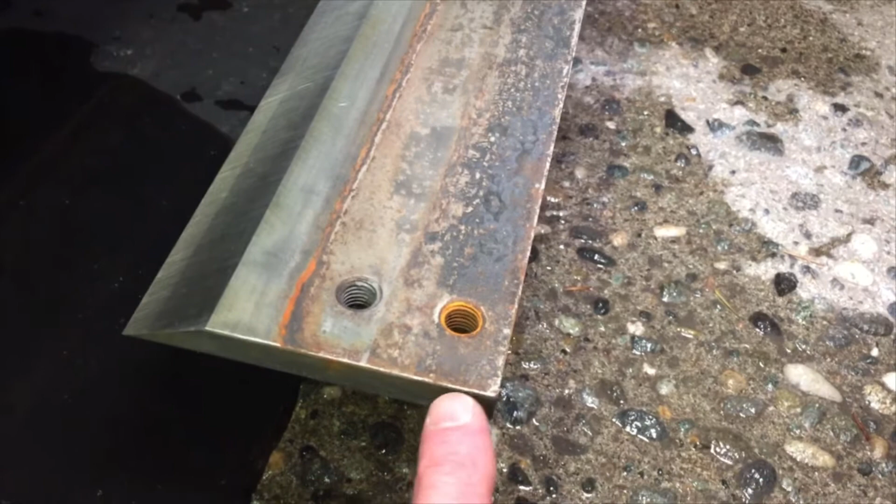One thing I want to address real quickly is the difference between the front bolts and the rear bolts. The front bolts here are used when the blade is super long, pretty new. As the blade gets sharpened and gets shorter and shorter, you use the rear bolts because it sticks the blade out a little bit.

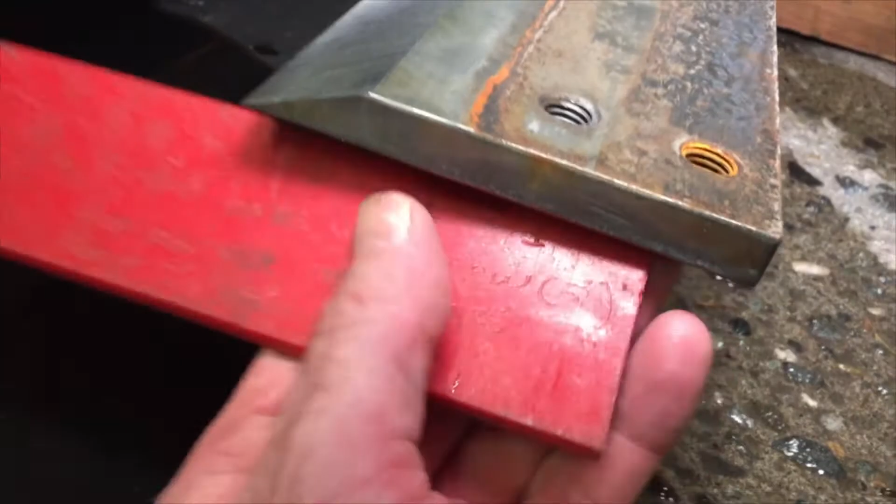So what you're shooting for here basically is anything underneath 4 inches, you're going to start using the rear bolts. You can see with this little measuring thing I made, right now I'm about 4.5 inches, so I've still got quite a bit of time before I have to use the rear bolts.

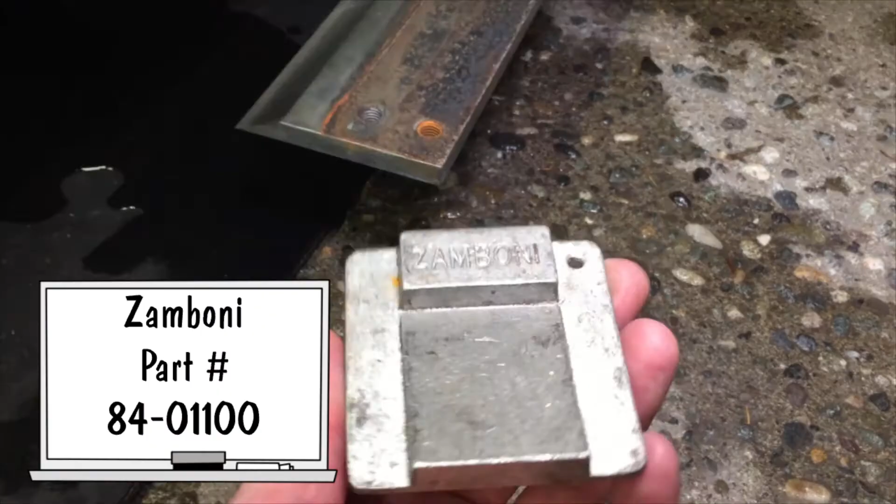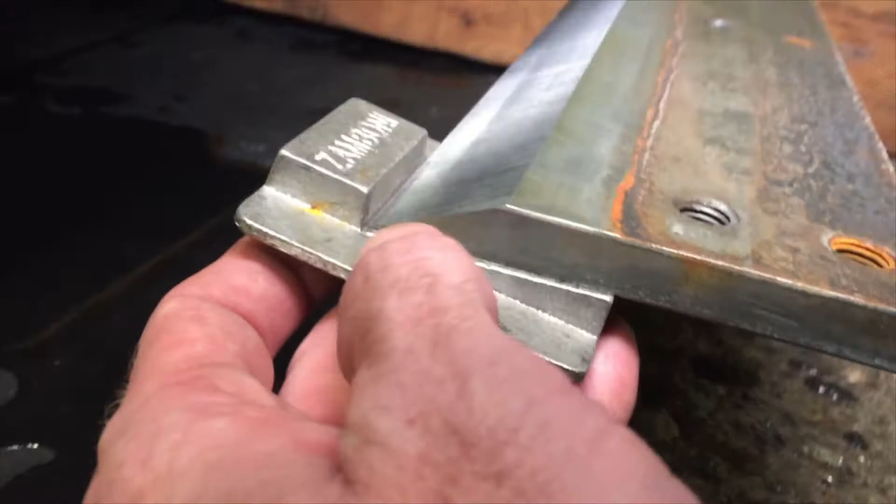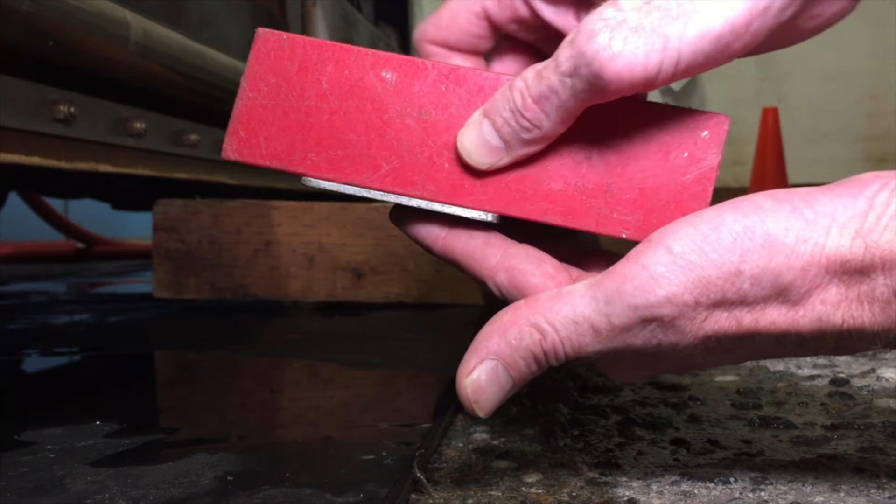While the blade's off the machine, I'm going to show you this blade adjustment tool that you could use. How this works basically is when the blade's on the machine, you stick this part on the blade, and this flat part you see is where the conditioner runner is. So this is on the blade, and let's say this red thing here is the conditioner, and if it's not lining up flat with the flat part on this blade angle tool, you want to adjust your blade so it does line up with the runner.

Let's say this thing right here is the runner and it's sitting like this, so you'd have to lower the blade down to get it level with your conditioner runner. And conversely, if it's too high, then you have to raise it up. So when I get this thing on the machine, I'll show you. I just want to show you here off the machine first. I'm going to place it on the blade and check how the conditioner matches up to this little flat part on this blade adjusting tool.

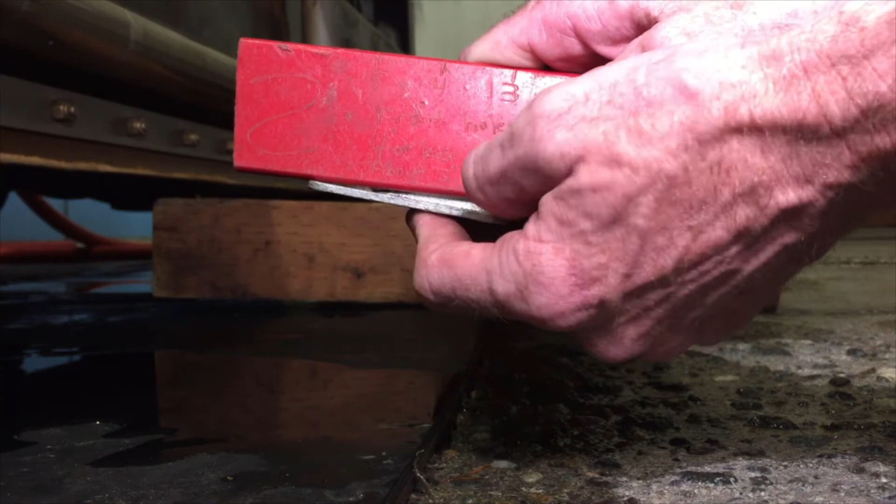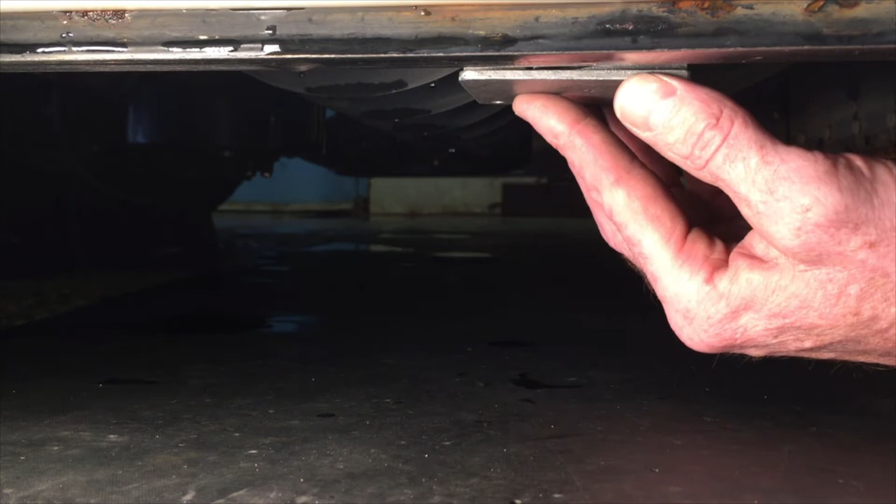I think I got a good view for you guys here. Again, with this blade adjustment tool, you want the blade to sit in this angled part right here, and you want the conditioner's runner to lay flat or flush with this part. So once you set it in there, I slide it towards the runner a little bit to see if it sits on the runner or hits against it. As you can see, it's bumping against the runner on this part right here.

So I want to lower the blade down so this flat part sits flush with the runner. Let me go ahead and give a few turns on the blade. All right, let's go ahead and recheck it here - stick it on the blade and slide it towards the runner.

Ooh, a little close. It seems like it's hitting on this backside just a little bit. But it's hard for me to see around the camera, so hold on here.

Kind of rocking a little bit in there. So I'm gonna call it, I need to go up a little bit because now it's hitting right here. All right, let's go ahead and check it again.

Stick it on the blade so it's flush with the blade and slide it over the conditioner runner. As you can see, it's sitting flush with the runner while it's on the blade, so it's set to the 10 degrees that Zamboni recommends. Nothing much to it, you just want to make sure this thing is sitting on the blade itself, and you slide it over to the runner, and if it's flush with the runner, you're good to go.

Let's go ahead and switch views here, and I'll show you how to do it with the washer, the sticker, and the blade bracket. After using the blade adjustment tool to set the angle of the blade, you slide the washer and the blade bracket right here, and you can tell it's lined up with the line there. As well as I could use this blade adjustment tool to do the same thing.

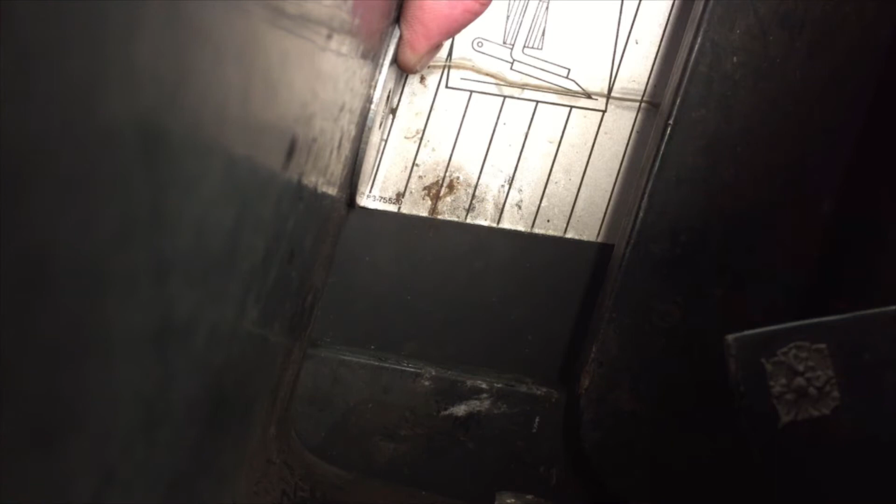Now you can tell right here that the washer is not parallel to the line right there. So what you want to do is turn the blade up or down based on where you are, so it matches these lines right here.

In my case, I know I have to move the blade forward to get the washer. Now I'm really looking at the back of the washer, and this plate right here needs to be parallel with the line. Well, I guess front of the washer, back of the washer, it doesn't really matter. Just make sure that they're parallel with the lines.

I got it back in position where it's at the 10-degree mark, where Zamboni recommends you have it set. Again, you can use this blade adjustment tool to do the same thing. Let me go ahead and switch views right here to give you a better look at this blade bracket with these lines right here.

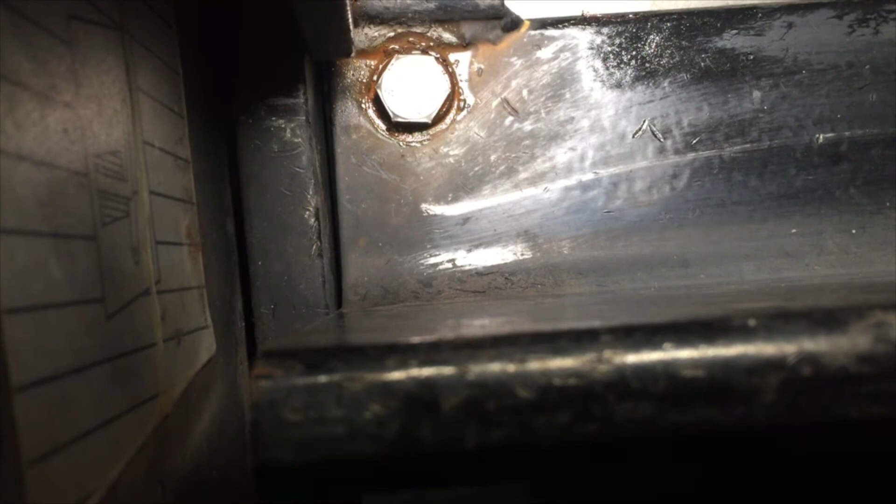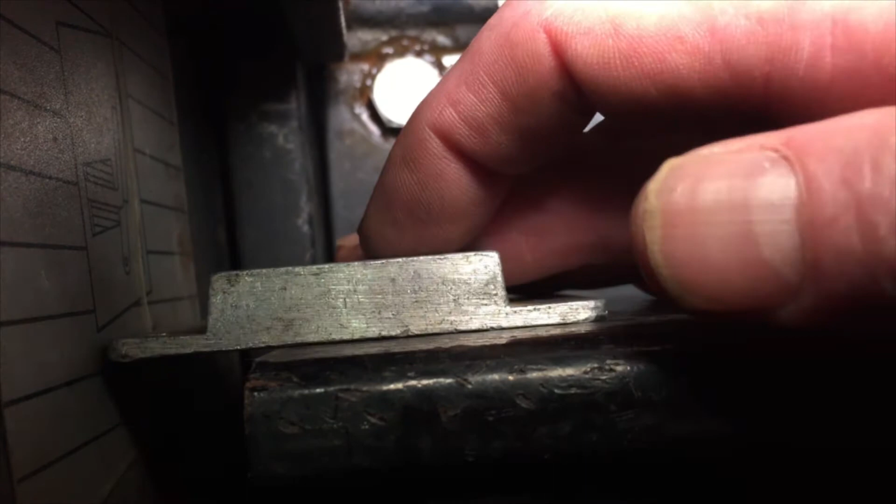All right, here's a top-down view of the blade bracket. I'll go ahead and slide that washer in there. As you can see, it's nice and parallel with the line. Let me go ahead and grab that blade adjusting tool, slide that in there. Nice and parallel with the line. That's all it takes to set the blade angle to the 10 degrees that Zamboni recommends.

Let's go ahead and use the washer on the side here with the sticker, or you go ahead and use this thing with the conditioner and the blade, which I think is more reliable, more recommended. If you're new, I think this is the better way, but once you've got it set, you go ahead and get yourself a reference mark here, and that's what you could use with the washer and this. I like to use the washer on the bottom to tap against the side of the blade to make sure it's level with the runner.

That's something I like the washer for, because it's a little bit thinner than this thing, and it's something I can feel a little bit better.

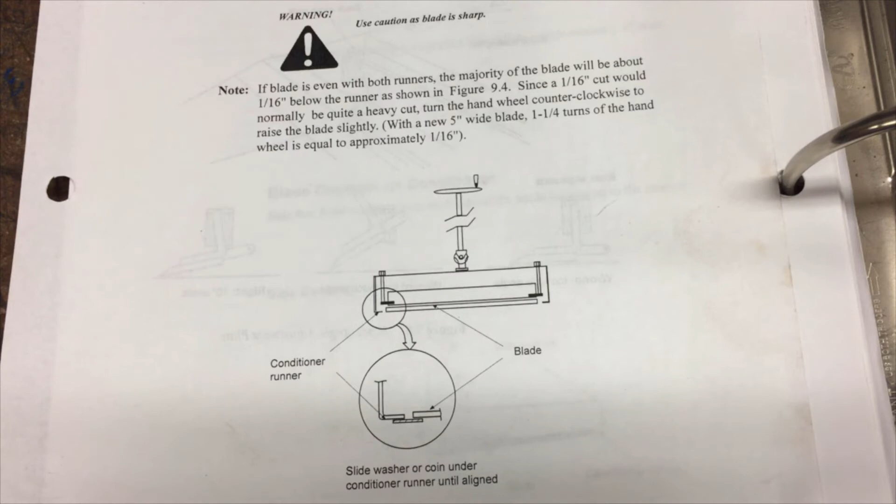Alright, but I was going to show you how to do that since we're here talking about it. After you get done setting the angle of the blade, the next step is to level the sides of the blade with the runner by using the washer or the blade tool. Basically, you're going to be lining the front edge of the blade with the runner by adjusting the blade adjustment bolts or leveling bolts on each side of the conditioner. You want the blade to be level with the runner after you set the angle of the blade.

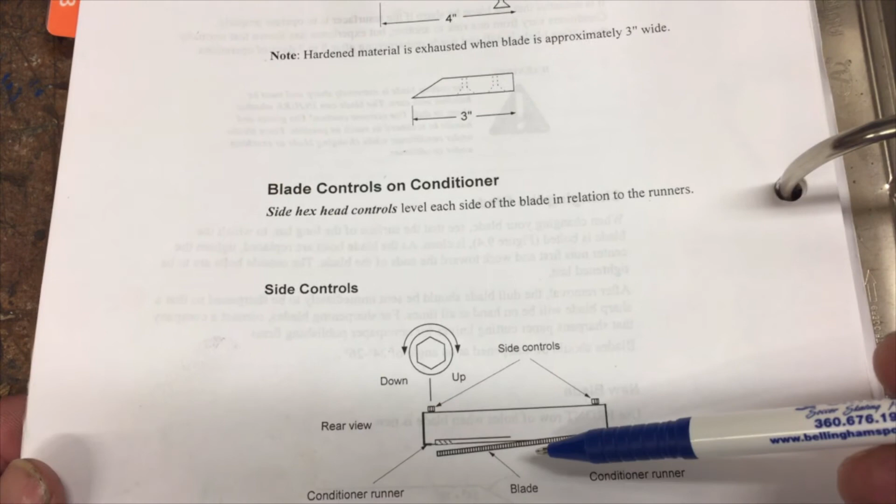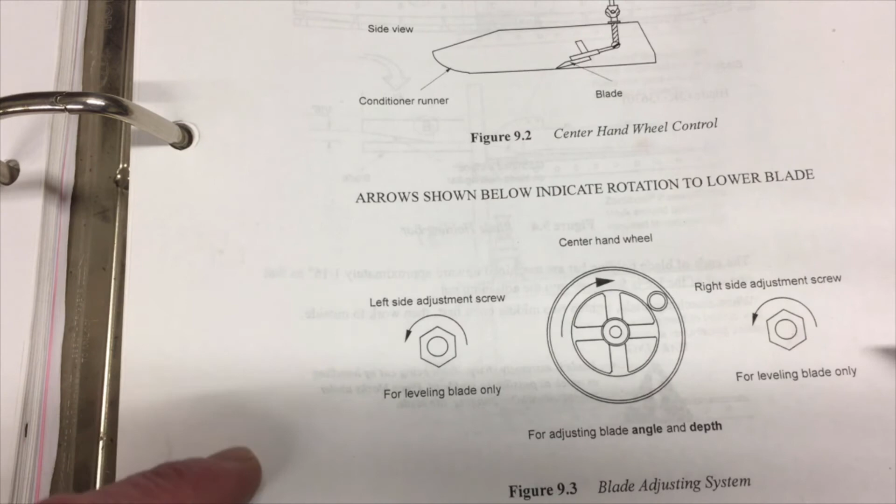And you can see that right here. You do that by adjusting these little bolts right here. I call them blade adjustment bolts or leveling bolts. They're on each side of the conditioner right here. You just gotta make sure that once you set the angle of the blade, you come through and level the blade with the runners, the edge of the blade with the runners, so everything's good to go.

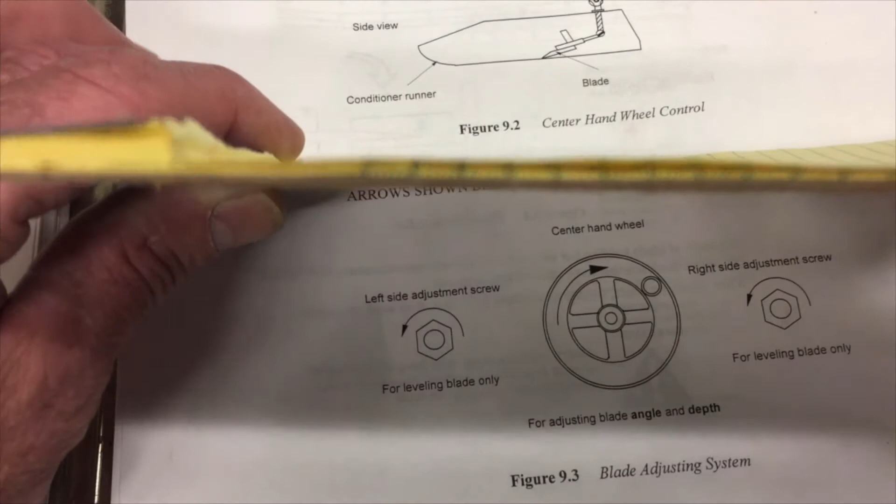Now, that's because at times you're going from a short blade to a long blade. So if this is the conditioner runner, and you had a blade on the machine, say you're going from a blade that's this thick to a longer blade, that blade's going to stick down underneath the conditioner. So once you get the angle set, you got to level the blade with the runner.

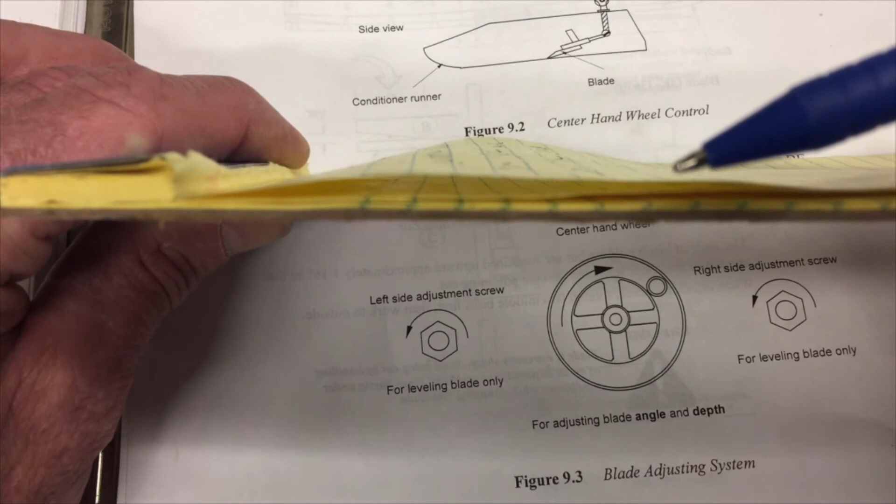And at the other end, if you had a blade that was a little bit shorter because it has less life on it, again, once you get that angle set, you have to level the edge of the blade with the runner, so everything is level.

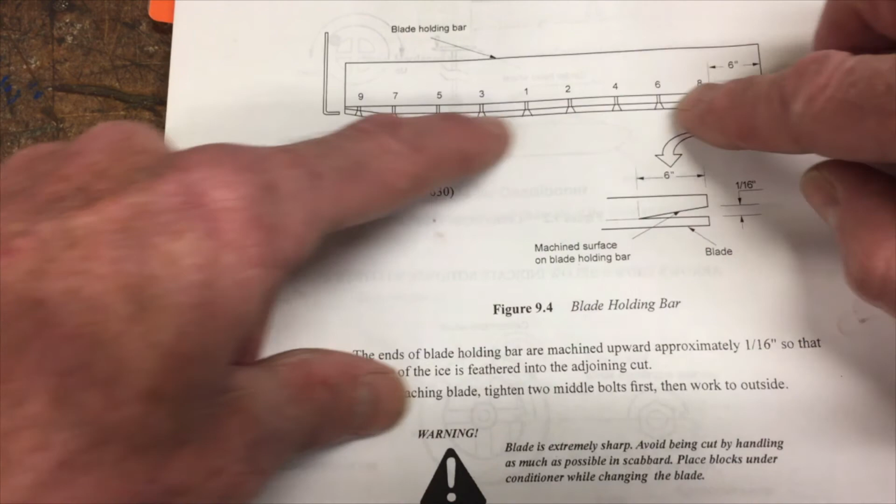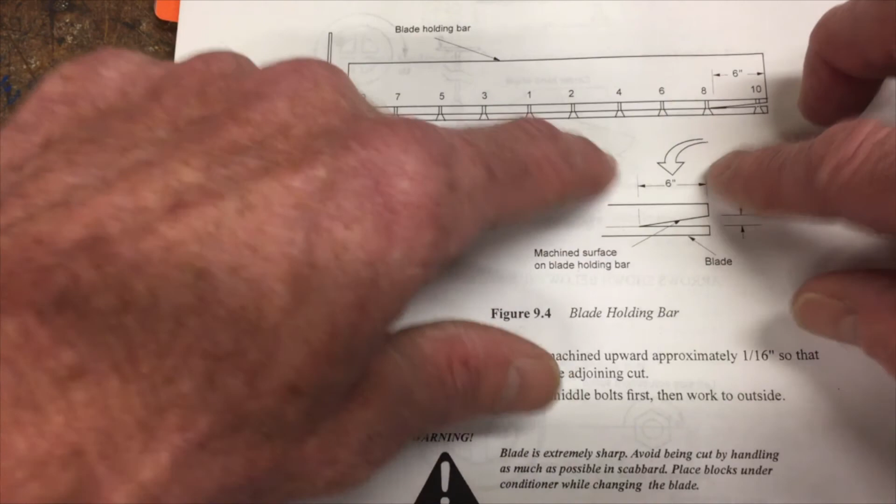One important thing too, let me switch pages right here. As you can see, when you level the edge of the blade with the runner, the majority of the blade itself is going to stick underneath a 1/16 of an inch. That's because the blade bracket itself is tapered the last, I believe, 6 inches on each side of the machine, about a 1/16 of an inch. It's tapered on either side so you can blend one pass into another and get smooth ice.

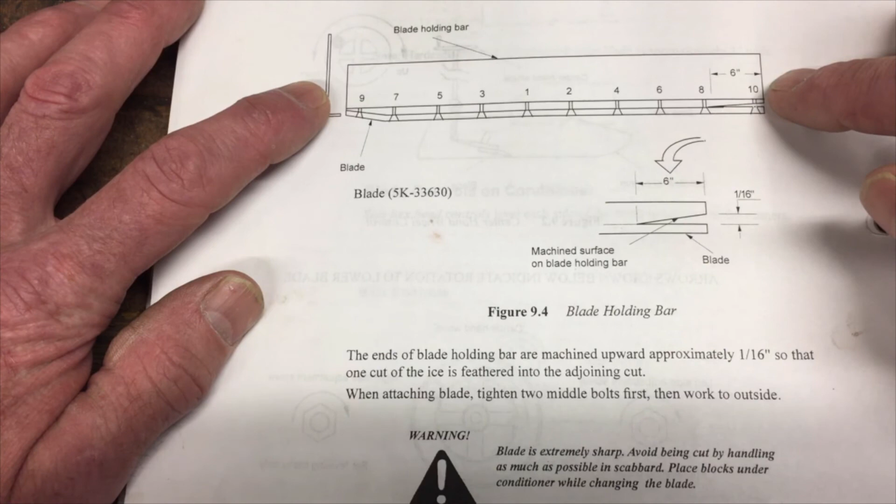So if you had the blade level on each side, the majority of the blade itself would be sticking underneath the conditioner a 1/16 of an inch, as Zamboni indicates right there.

It's important once you get this done, you raise the blade up a few turns. That way you don't gouge into the ice a 1/16 of an inch, because that's a pretty aggressive cut. So basically what I do is raise it up a few turns, go onto the ice, and do my last adjustment on the ice.

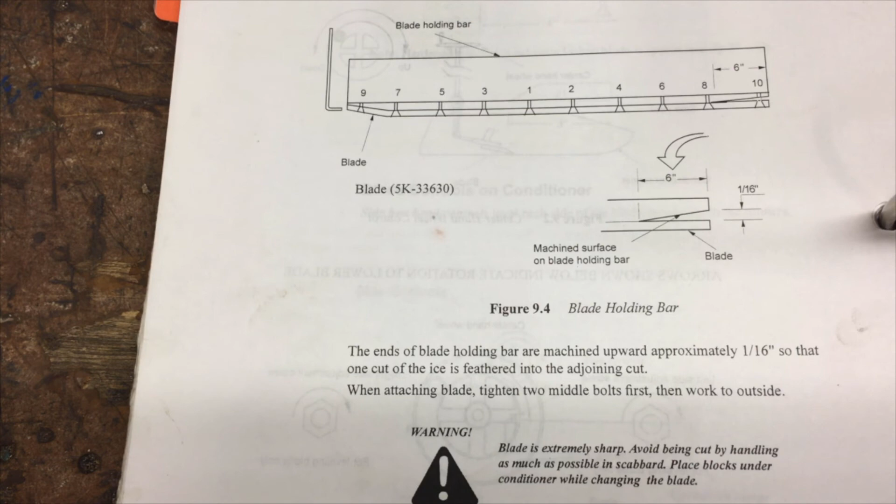Go ahead and check that video out if you're not sure what I'm talking about. But when I drop my conditioner down for the last adjustment, I just lower the blade nice and easy until it starts biting the ice, until I start seeing scrape marks and the powder starts going into the augers, into the tank. At that point I know I'm scraping good. I do my final adjustment if needed.

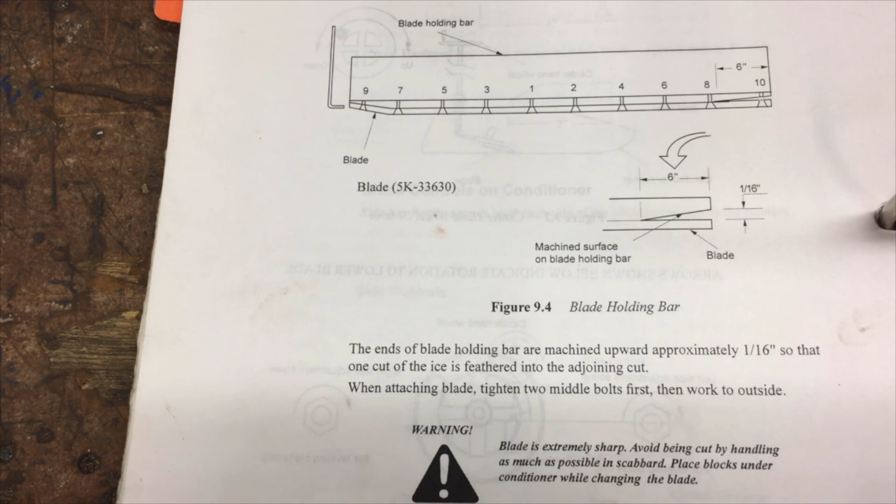But the important thing I'm trying to get at is that once you set the angle of the blade and level the blade with the runner, you got to make sure you pull that blade up a few turns, or you're going to gouge right into the ice.